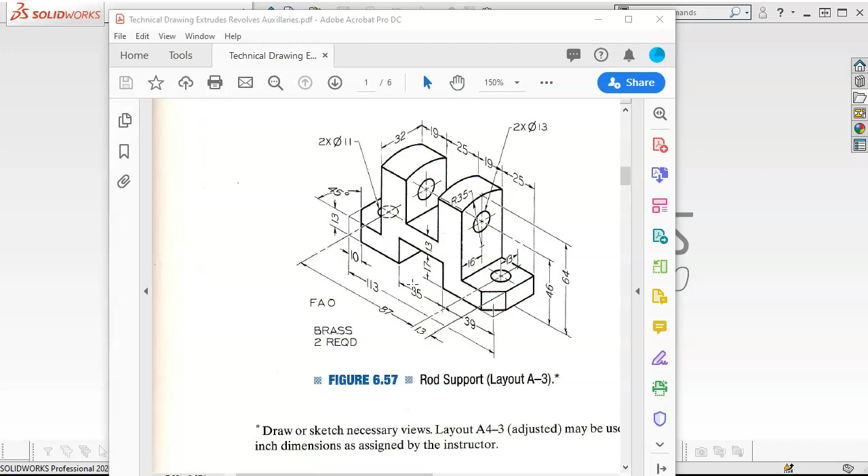We'll end up machining, finishing, or otherwise making it look nice. So with it being brass and quantity of 2 for the assembly, we're going to make one. When we take it into the assembly, we'll just bring in another instance. So we're going to fly this out of the way, and we'll open up the new part.

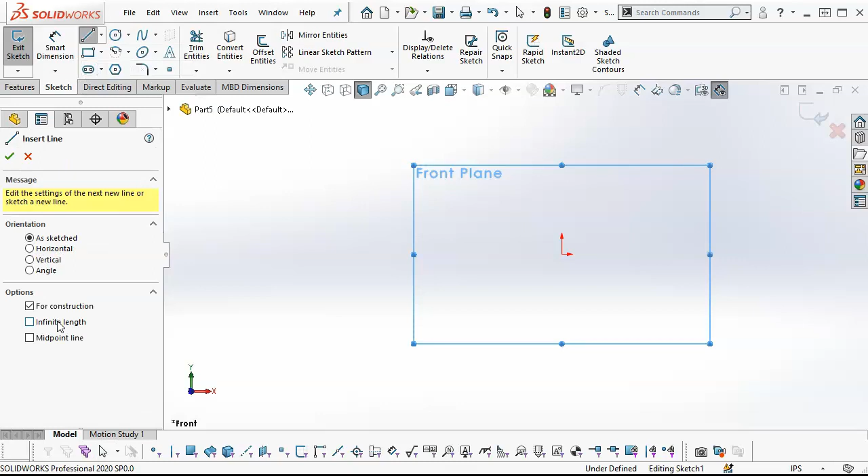Now I do have a template that's metric, but we need to run through this process a couple more times. So if I switch to millimeters, grams, and seconds first, recognizing that the part's in millimeters, but most of the time I'm going to go ahead and start sketching, and then about the time I fly the first dimension, usually, is where I think, oh, I really should have put that in metric.

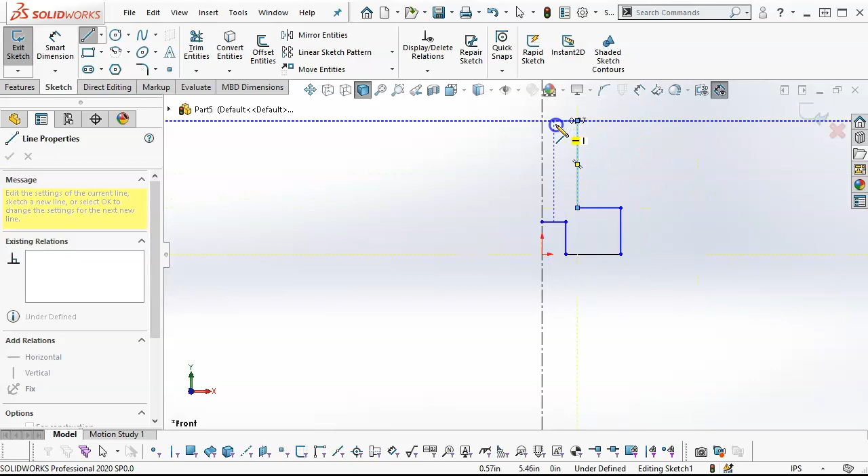So just to revisit, we're going to sketch 1/2 to take advantage of our symmetry. And I'm not being overly particular with the size and the scale. We'll let the dimensions draw that in. So I bring it out to this point, and then I could utilize the center line, but let's just go ahead and mirror this over. I have enough of the geometry.

And I apply the first dimension, and I see, oh, it's in inches. Alright, so I'm going to hit escape, and I'll come down and do the millimeters, grams, and second. The sketch turns gray. So to switch over to millimeters, grams, and seconds, it's exited me out of the sketch. My confirmation corner is gone. The sketch is in gray. My origin, my little red origin, has disappeared.

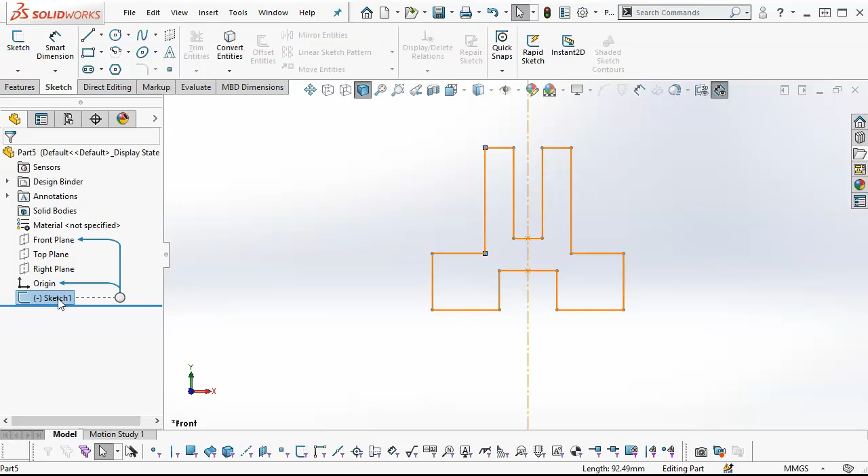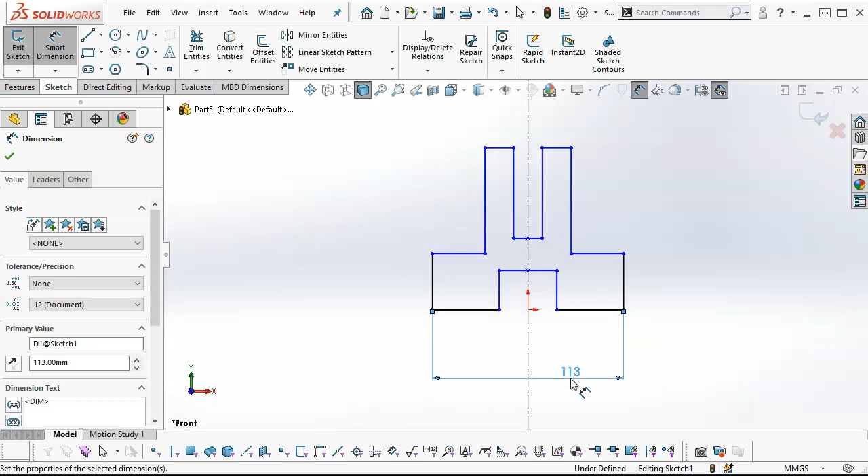So I'm going to come back over, right-click, and edit sketch. Or if we come back to the sketch and I have either the geometry or the sketch and the feature tree listed, go into sketch, that will return me to where I'm seeing the black and blue lines. Alright, so overall, that went to center. Okay, so the 113, that's going to shrink it up a little bit, but since it's the first one, notice the geometry didn't really change, it just kind of self-scaled.

Height is going to be 13 millimeters. The interior is 17. The width is 35. And I'm using the scroll wheel mouse just to kind of zoom up a little bit. Anything that's going to help me with those selections, I'm going to utilize. Top is 19, width is 25.

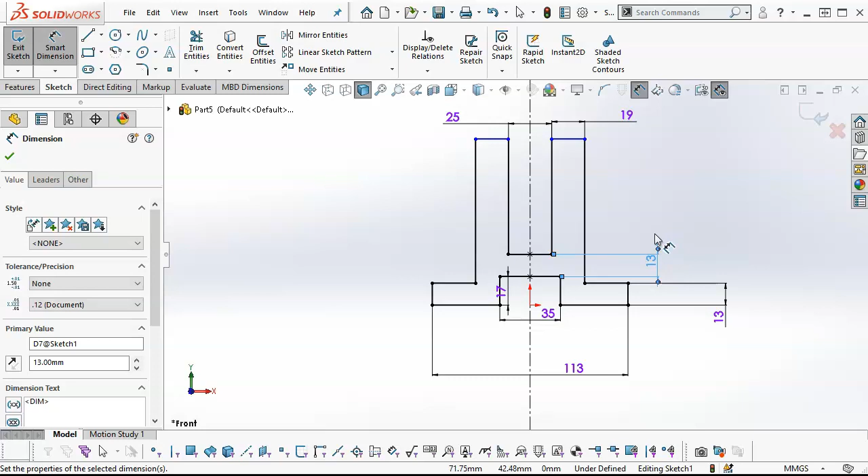And because of the symmetry, I don't really have to worry about both sides, as these are adjusting and kind of massaging them into shape. They will gradually bring the numbers in to generate the geometry. Alright, so we're going to go ahead and extrude. If, for whatever reason, we wanted the origin at the bottom middle, this is another end condition that we could work from with mid-plane. So mid-plane, and our depth is 32.

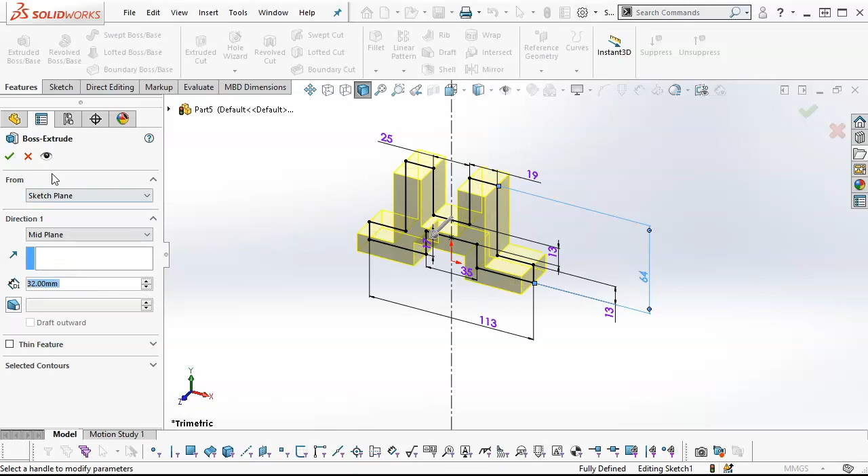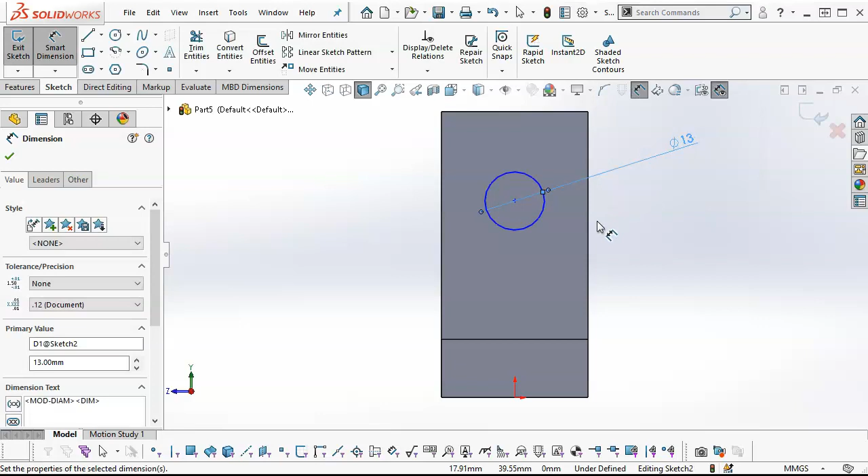Alright, so we have some chamfers on the corner. I'll save those to be a separate feature. Just go ahead into the sketch. Draw the through hole, and it has a 2 times 13 millimeters call out. It is from the base 46 millimeters up,

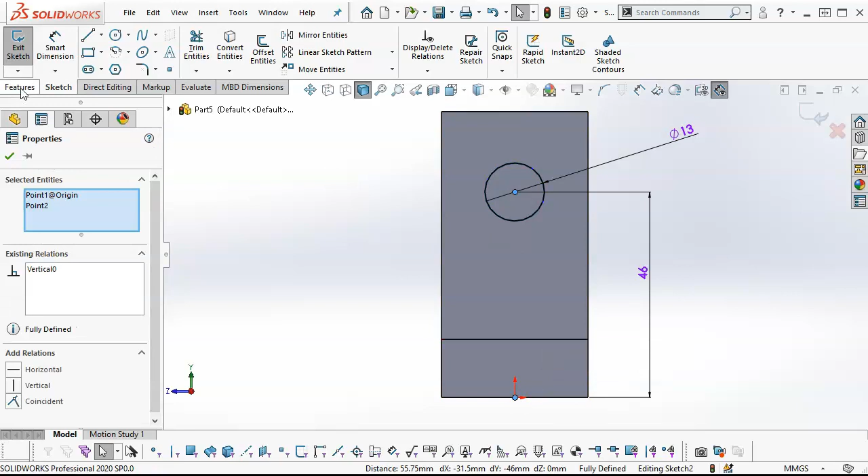and then centered. We're given 46, so as long as it stays centered, if I always want it to be centered, I can select the center point, Control select the origin, make those vertical. And then my features, extrude cut, and if we go up to next, then it's going to stop at the end of the first feature. If we go through all, it'll find its way through everything.

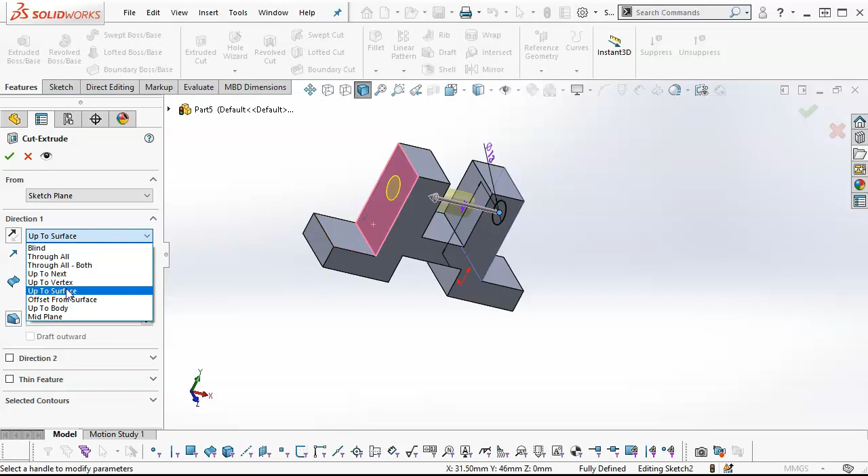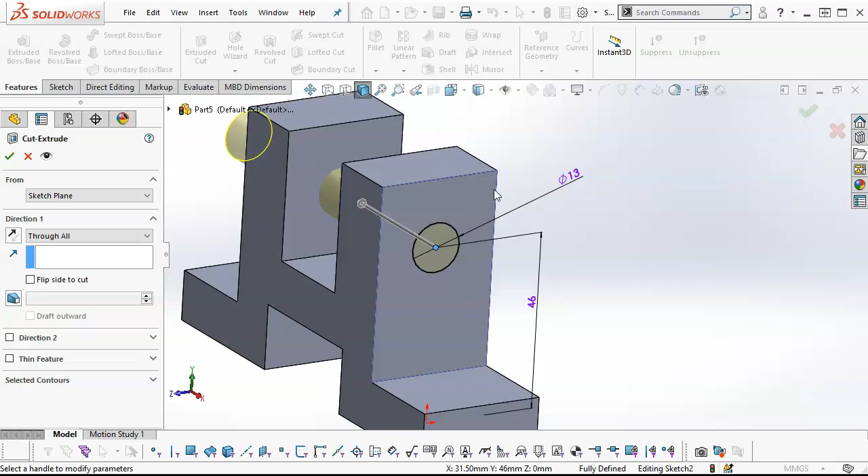If I go up to surface, I could pick that surface and it would terminate there. We were using up to vertex earlier, so if I were to pick a vertex, pretty much any of the corners, anywhere those shapes come together, that's going to be valid. So what I wouldn't want to do is the arc is going to be kind of an open profile. I would have to close it off and have two closed regions for the cut extrude to work by itself.

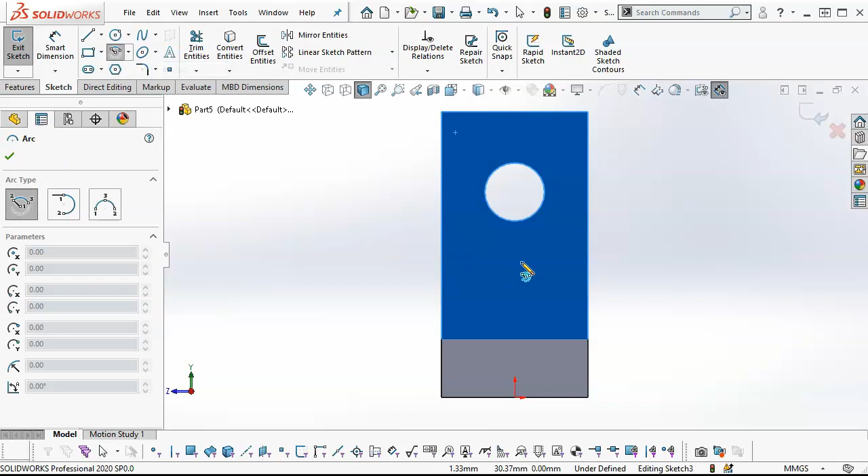When we go in and create this arc, then I'm going to have a little bit more flexibility if it is a feature on its own. So we could do center point arc, tangent arc isn't going to work, 3-point arc would be okay. So if I bring a center point, make it coincident to the outside, it goes the wrong way, I'm just going to keep going that way, maybe. The fun part of the center point arc, kind of getting back to that starting point and having it complete.

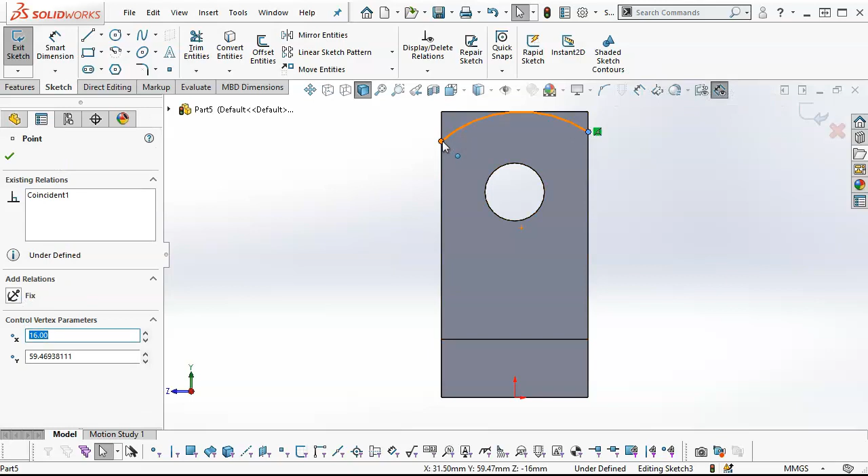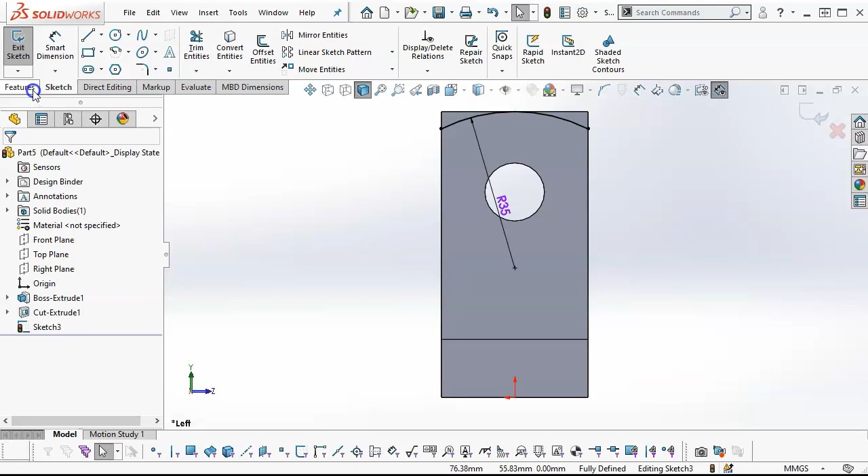Alright, so we will Control select the edge and the arc to be tangent. Going to make the two endpoints horizontal to each other, and then 35 millimeters for the radius. Alright, so where this contacts as a tangency is technically another one of those zero thickness geometries. So let's go ahead and see what we get. Extrude cut, and we're going to tell it to go through all, and it calculates.

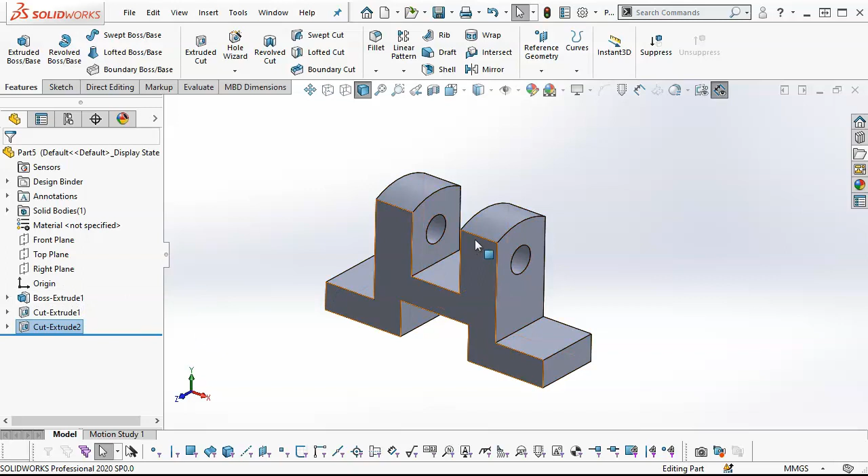So in previous versions there have been problems where it sees that where it can't solve. And if that's the case, maybe we'd come back and make that tower a little bit bigger, and our arc geometry would have to set the height. Since it follows the tangency, we'll call it good.

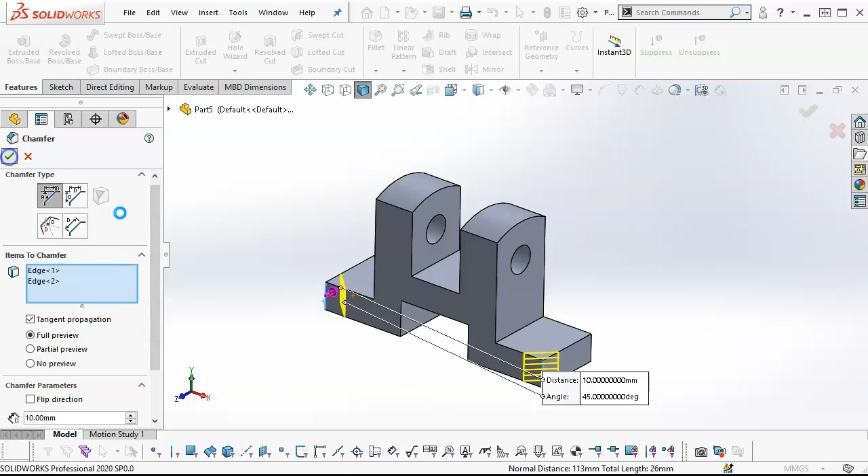Alright, I'm going to Control select the two edges. Under fillet we're going to find chamfer. If I right click on those, it would show up on the context menu as well. And we are 10 millimeters by 45 degrees. That's already set, so we'll go ahead and accept it.

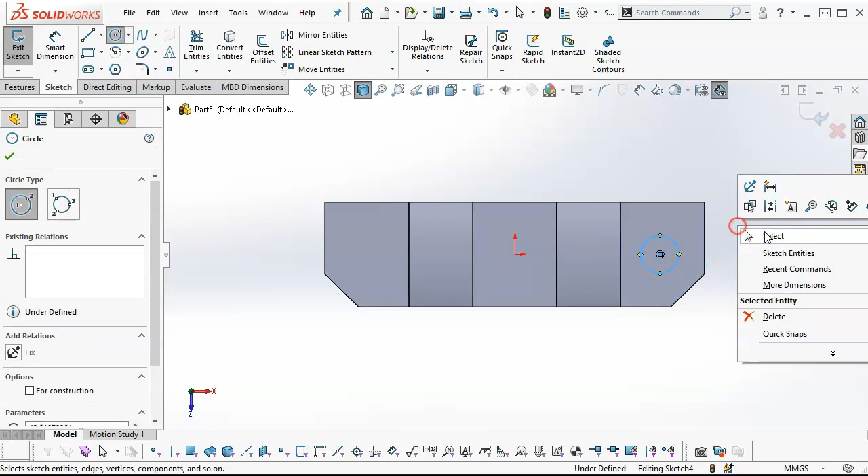Because these faces are on the same plane, I can sketch the hole. I could also come from the bottom, which would probably stay the same in any revisions. But even though these are not the same face, same geometry, I can still use my symmetry. I can still pick up that geometry. And so if I Control select and mirror,

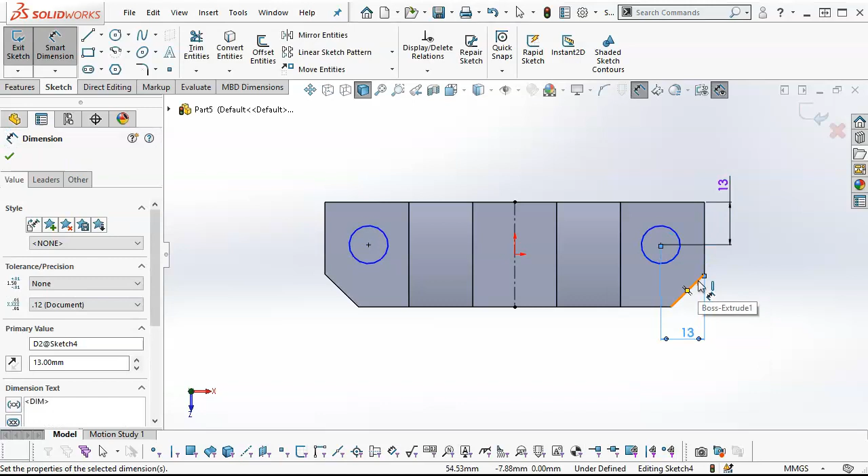and we are 13 millimeters from the back and 13 millimeters from the edge. And the diameter is 11. Okay, we'll go ahead and accept. I can extrude cut and up to next or through all.

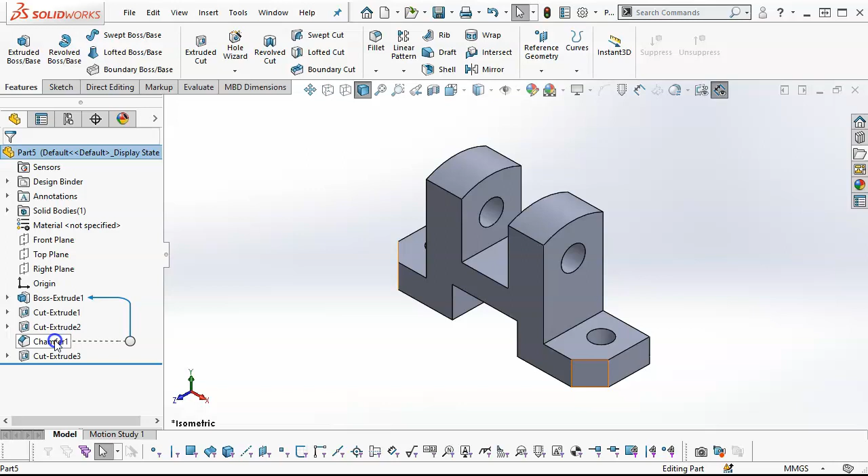Okay, so one of the things that I would probably make a habit, the fillets and the radii and the chamfers, I pretty much put in last. So since I didn't do those last, I can grab that feature and drag it down and reorder. And as long as it's not a parent-child relation, it will reorder. So one of the things we can use to define parent-child relations, dynamic reference, both of those are on. So let's see if we're getting it.

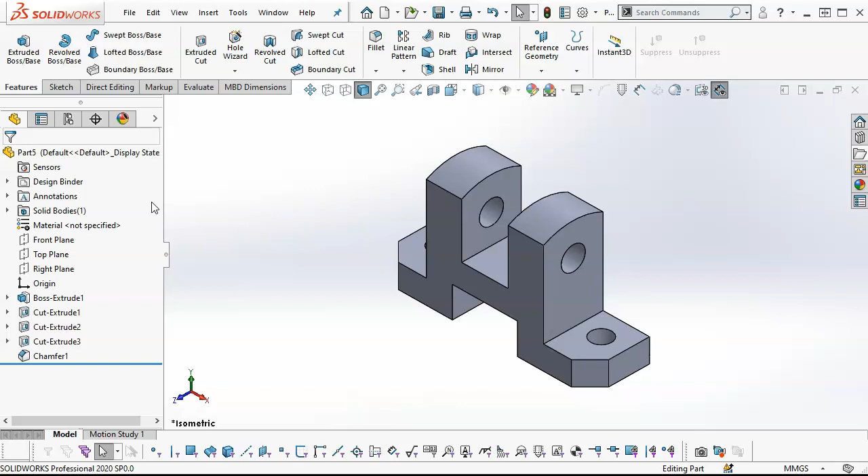Alright, so up to the boss extrude, up to the origin, and sometimes we'll see those in 2 or 3 places. If there is a lower reference, then we would be able to pick those up as well. It goes both ways. But not seeing that just yet.

Alright, so material, we're looking for a brass. So under the copper alloys, some of these you're just going to have to memorize or know enough about the properties of materials to recognize which one to jump into. So we set the brass. We're going to see the color again. If you have the video card that supports the RealView graphics, you'll get the nice shiny. Again, that's kind of annoying while you're working through. I don't mind the color and textures so much, but sometimes those reflections can be a little annoying.

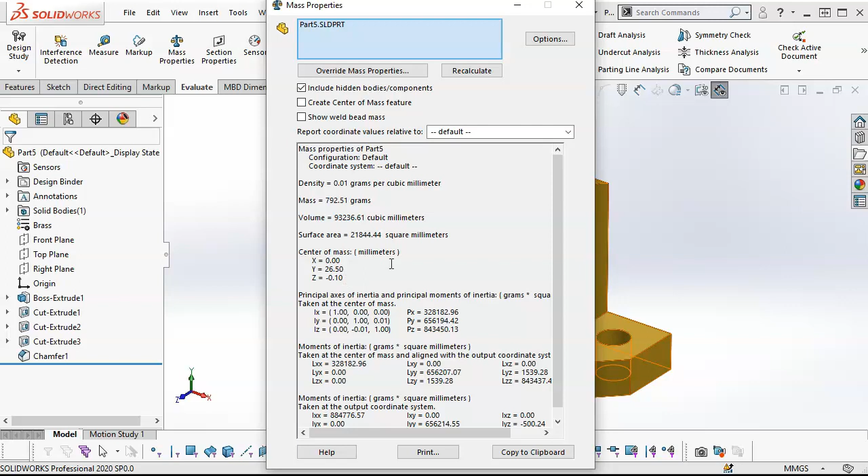So evaluate mass properties with the origin at the bottom center. Center of mass is 26.5, and those holes being shifted back just a little bit set it back 0.1 millimeters, so not a whole lot. Alright, so we're going to save this and we'll be on to the next one.